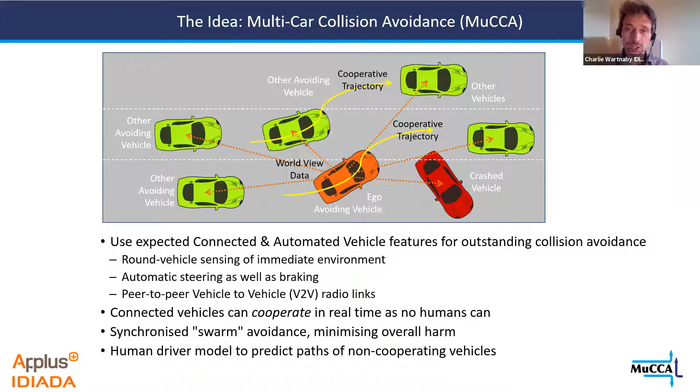So the project's scope also included modeling where human-driven vehicles are likely to go, where the humans are likely to drive them. And that was modeled in Cranfield, and actually you, being Cranfield, did experiments in simulator rigs to get volunteers to drive in simulated situations, and then model that with a recurrent neural network. And so that was part of the project scope. Now I won't tell you much more about that because that was the Cranfield part, and I can tell you more about the vehicle part that we were more involved in.

So I've said we wanted our vehicles to cooperate, and it's not at all obvious how you get them to cooperate. And when we started the project, I wrote a paper which, in retrospect, is mainly nonsense, for the Intelligent Transport Systems Conference, because at that point we were thinking we would need maybe a voting scheme or something. If you had multiple cars with different ideas of how they should resolve the situation, they'd have to kind of have a conversation almost, and maybe they'd have to rank their different solutions to how to avoid a collision, and then get everyone to follow someone's plan.

And then we're worried about what happens if the plan changes with time. But in the end, we didn't do any of that. We did something much simpler, which I'll show you. So hopefully I've got an actual simulation here. If it still works, haven't run this for a while, then I can show you how our cooperation worked.

So what we ended up doing was having a scheme where each vehicle kind of shared its plans with all the vehicles around it. So it shared its plan of where it intended to go, but also it would share its plan of where it wanted to go, even if it couldn't because there were other MuCCA vehicles in the way. So that's the planned and desired trajectories. So we call this the desired versus planned approach.

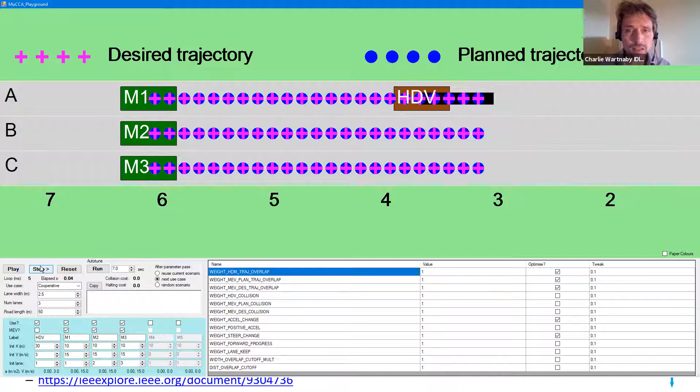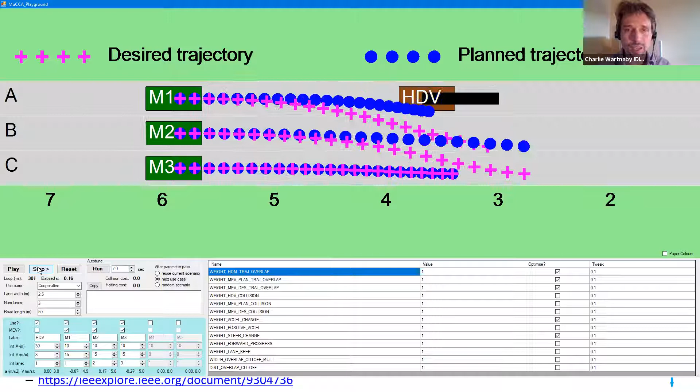And if I just reset, we don't have to just have 2 cars, we could have 3 cars. And we have the same sort of thing. So now M1's saying, oh, I want to swerve out of the way, but I'm going to plan to brake. Then M2 says, well, in that case, I would like to swerve out of the way, but I can't because M3's there. So I will just plan to go straight on, but I would like to steer if I could. And unfortunately, in this case, M3 is boxing M2 in, and that means M2 is boxing M1 in. So we don't have a cooperative swerve available.

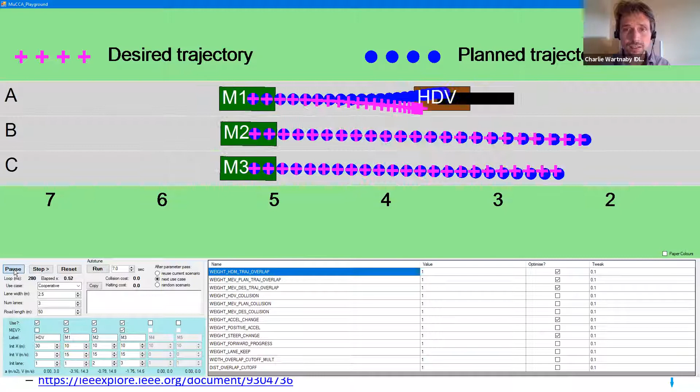And if I press play, M1 will eventually be forced to brake as hard as it can. M2 and M3 can get past all right. And it's going to be pretty close for M1. And oh dear, right, okay. So obviously that wasn't a good outcome.

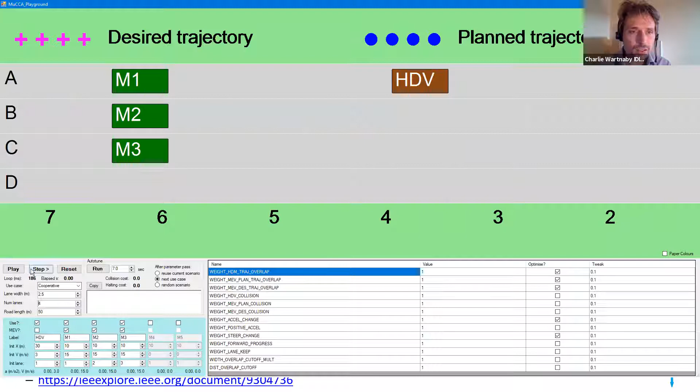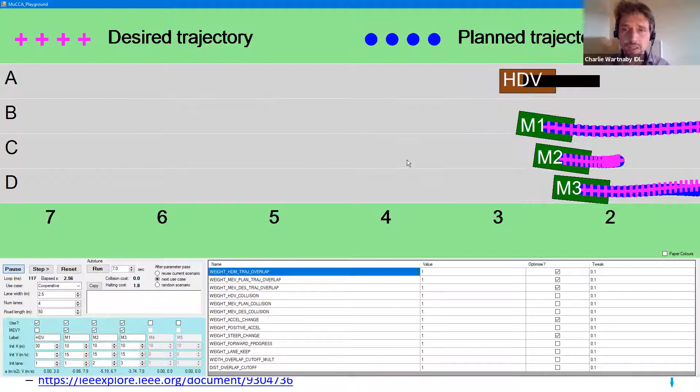But if we give it another lane and try that again. So now M1 says I want to swerve, M2 says I want to swerve, M3 says, okay, I can do that safely now. And they all get round. So that was the algorithm. Just sharing the desired and planned trajectories and accommodating each other. That's how we solve the problem.

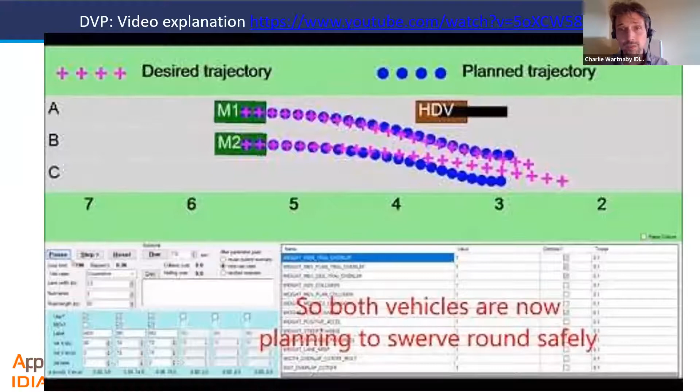So I'll just go back to the slides. Oh, there's a video. So there is a version on YouTube. So if anyone was looking at these slides offline, then they'll be able to play that.

Sorry. Right. So the actual solving of those trajectories was through model predictive control. For those who haven't encountered it, the idea is that you have a cost function that measures the goodness or the badness of your future trajectory. And the actuator outputs that control your vehicle are in effect the independent variables that you can apply as a function of time. So you might say, in 1 second I will be steering to the right, in 2 seconds I'll be steering to the left, in 3 seconds I'll be going straight on.

And you throw the actuator outputs, the variables, into a numerical optimizer. The cost function is then minimized by avoiding things like overlaps between vehicles, and you end up with an optimal trajectory that you can achieve given real actuator outputs. And then you apply whatever the immediate outputs should be, throw away the rest of the solution, and do it all again in another time step. So that's how we plan the trajectories.

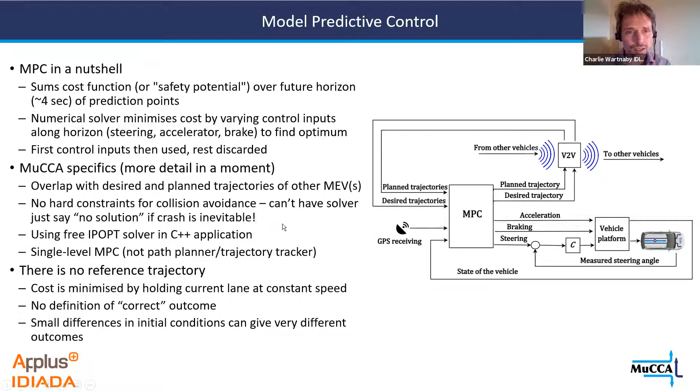Now the version in the vehicle was pretty simple, but at Cranfield, Marco's colleagues did some much more advanced versions with more fancy solvers and 2 levels of MPC, one for trajectory planning and one for trajectory tracking, and a much more complicated vehicle dynamics model, which we didn't have. So within the scope of the project, there was a lot of detailed work done here, but the version on the vehicle was relatively simple. I'll just go on to the next couple of slides because that'll explain things better.

So we want to avoid the cars overlapping because that's a crash. But sometimes people put that in as a constraint when they're doing cooperative work like this, so that the solver will never return a solution that results in vehicles overlapping, which sounds like a good idea. But if you're in a real vehicle, you might find yourself in a situation where a crash is inevitable. You don't want to ask the solver what do I do now, and the solver just says, sorry, no solution, mate, because you've got to do something.

So instead, you've got to have a finite cost to crashing. It's expensive, but your solver will still return a sensible solution, and that solution is likely to be brake as hard as you can to minimize the cost. So we used sigmoid functions like this to make a box of potential that discouraged the vehicles from overlapping.

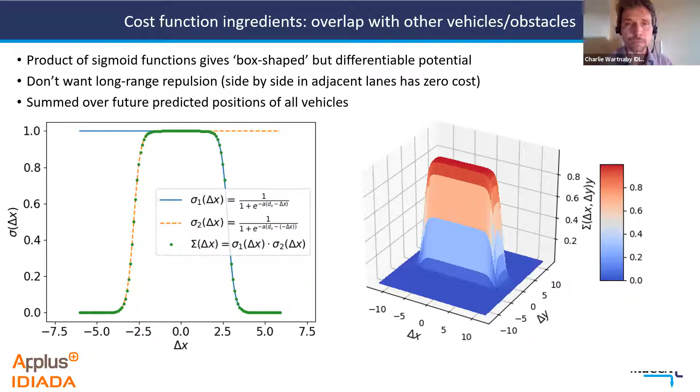There were some similar things for preventing vehicles going off the edge of the road, and then just a gentle term that meant the vehicles were encouraged to stay in lane. So this whole thing wasn't based on lanes. The vehicles were free to go anywhere they wanted across the motorway, but if there was no other reason for them not to, then they'd go straight on.

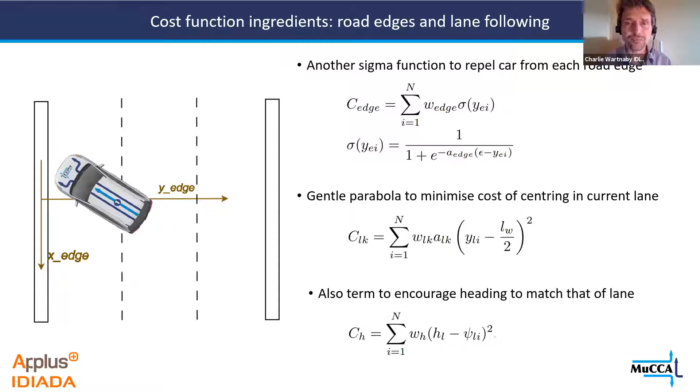We did have constraints on the actuators, so they'd be within physical limits, and also some terms to discourage very strong braking or very strong steering. In fact, we cheated a bit, and we particularly penalised braking because we wanted to see that kind of cooperative swerving behaviour. And that's because in a real motorway situation, when you're doing 70 miles an hour, if something bad happens just in front of you, you don't really have time to brake in general.

Steering gets you out of trouble in a better way. That's very different from an urban situation where you're driving slowly and you do some calculations about how to avoid collision. Then braking nearly always does work.

Now, in our practical demonstrations, the cars, I'm afraid, were going pretty slowly, like 20 or 25 miles an hour, but we wanted them to behave as if they were going down the motorway. So we wanted to encourage cooperative swerving, steering behaviour. So we just turned up the weight of the penalty of braking in our model predictive control optimizer to encourage that steering instead of braking.

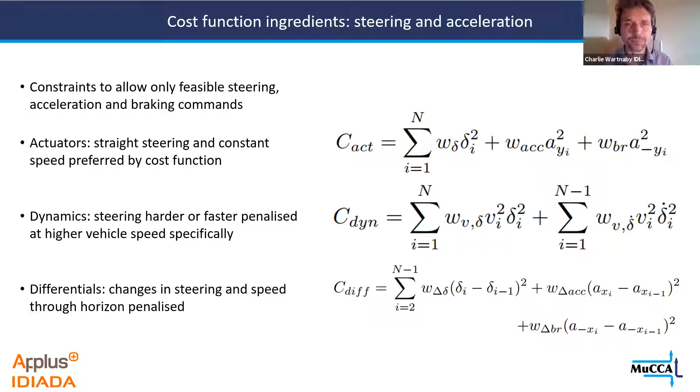So the actual cooperation was done via maneuver coordination messages. That's a draft from ETSI. And as far as I know, I don't know of anyone who's used those in real life anywhere else. If there was one thing that this project really succeeded at, it's that it was a very, very clear example of real vehicle-to-vehicle, radio-mediated cooperation amongst vehicles.

So we exchanged these messages that swapped the desired and planned trajectories every 20 milliseconds, which is much faster than we needed to, because actually our solver was quite slow. And the knowledge of what the vehicles could see was shared as well, which we used in demonstrations.

And actually Marco did some work on figuring out how we could best use a Kalman filter to combine a vehicle's own knowledge of what it could see with knowledge it learned from another car that would be time delayed. So you might say, oh, I can see a car there, but I've just heard from that other car that can see it better, that 50 milliseconds ago it could see it there. And knowing how to combine those optimally is something that Marco did.

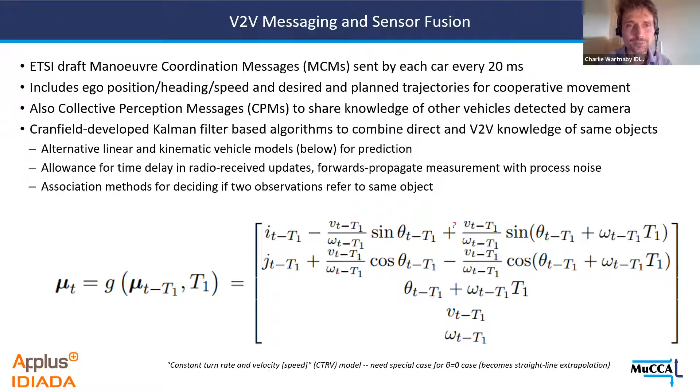So anyway, this wasn't just a theoretical project, it was real. And we went to the Bruntingthorpe Proving Ground to do this. In future, we'd go to CAVWAY, our own proving ground, once it's built. But here we are at Bruntingthorpe with a nice straight bit of runway and the strange aeroplanes parked around.

So we had a safety driver on each vehicle able to take control. And the safety drivers would set up the situation by driving the cars manually. And then when they were side by side, going at the right speed, they'd press a button on a dead man's handle. And at that point, the computer would be entirely in charge of driving the car. So the steering, braking, acceleration were all under car control. And that's true of both cars side by side, and they're talking. So then they become like a sort of hive mind.

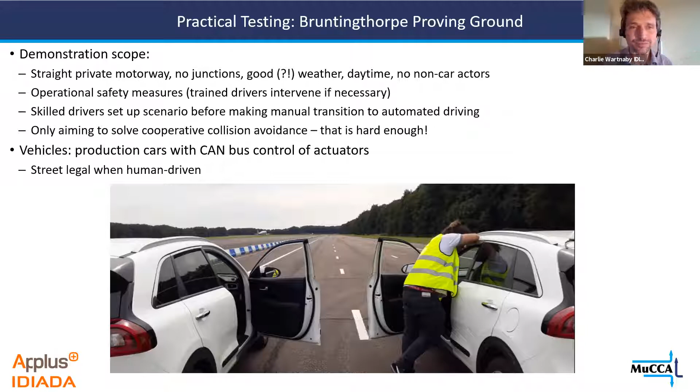Now in control terms, I've told you that we do a lot of electronics in Cambridge. So I don't know if you can see my mouse pointer, but that white box in the back of the car is a unit we built. So that's the main ECU, the main computer in the car. It's built around an NVIDIA GPU module, and it's got loads of I/O for doing automotive stuff. It runs Linux, but also it's got the built-in vehicle-to-vehicle radio and the built-in differential GPS as well. So it kind of had everything we need.

And we were quite proud of this, because if you look in the back of a lot of research vehicles, they're usually stuffed full of a whole rack of computers and bits and pieces held together with cable ties and Ethernet cables and things like that. Whereas we could actually hide all this underneath the boot floor and put our luggage in and drive to the hotel in it. So that was quite good.

We had a touch screen in the front, and that showed a picture of what the computers were understanding. So we could understand what they could see, and we could demonstrate that they were using this cooperative planning.

The only sensing we had, and this is going to really disappoint you guys in the Autonomous Vehicle Society, I'm sorry, we had one camera behind the rear view mirror, which had a neural network from another partner from Cosworth, and that could identify cars, but actually it didn't really work far enough away to do the main control task. So we used that in some demonstrations, but we generally relied on the cars just telling each other where they were using GPS coordinates. But then it's the cooperation that really mattered.

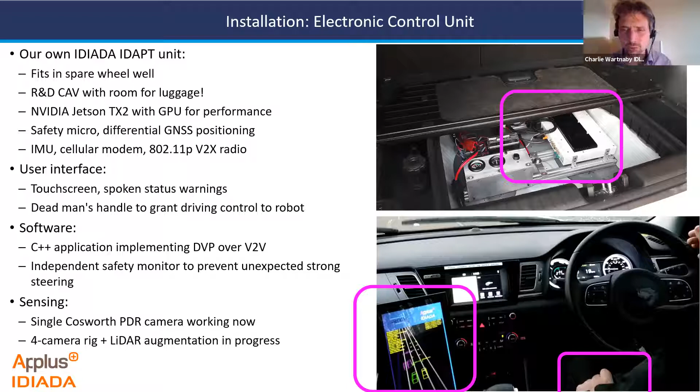So this was the kind of scenario we set up. So we had two cars side by side, very much like that simulation I just showed you, going down the road, coming up against one obstacle. They do this cooperative swerve that is the first in the world. It's great. And then they'd face a second obstacle and they'd split apart.

And I'll show you a video in a second, which is actually the one that we took in development work. It's before it was public. It was kind of less formal. The real thing is on YouTube, the kind of final dissemination event. So that's sort of more glossy production with drone footage and the foam cars and everything. With this one, we're just going around traffic cones, but I hope it gives you a better idea of what it was really like. So I will attempt to play this video.

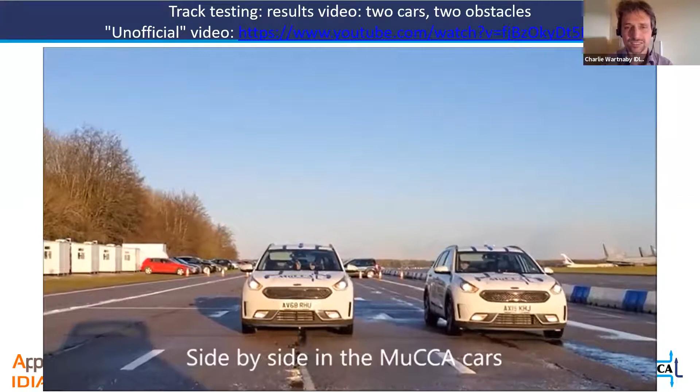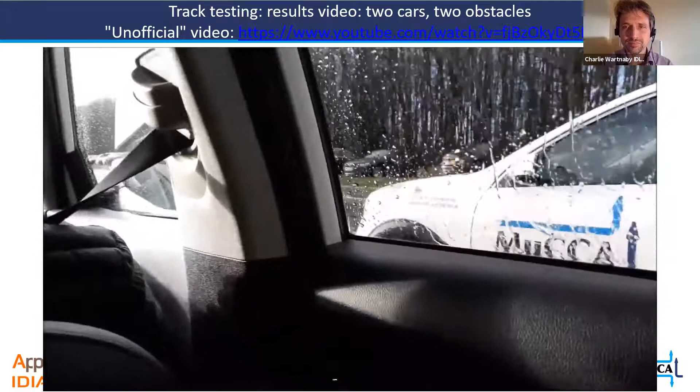Three, two, one, go. Okay, so we're side by side at 20 miles an hour in the two MuCCA vehicles. MuCCA has control. They're now fully under computer control with cooperative algorithms running, coordinated by vehicle-to-vehicle communications. Coming to the first obstacle in lane 1, so we expect a cooperative swerve away, which has happened.

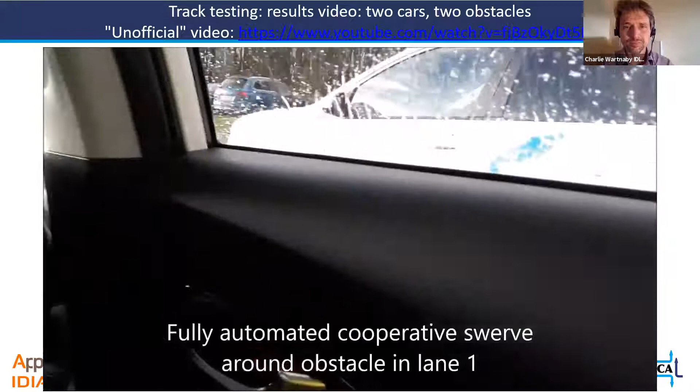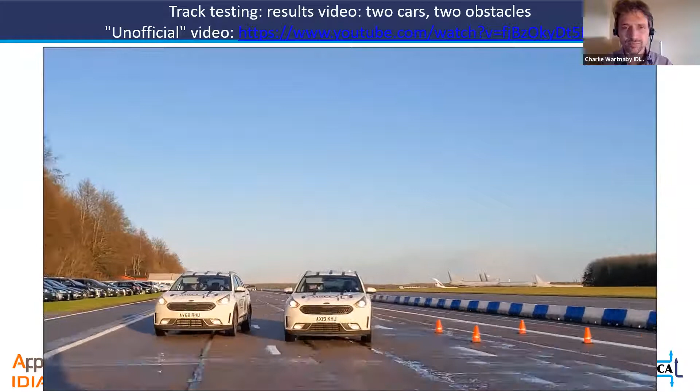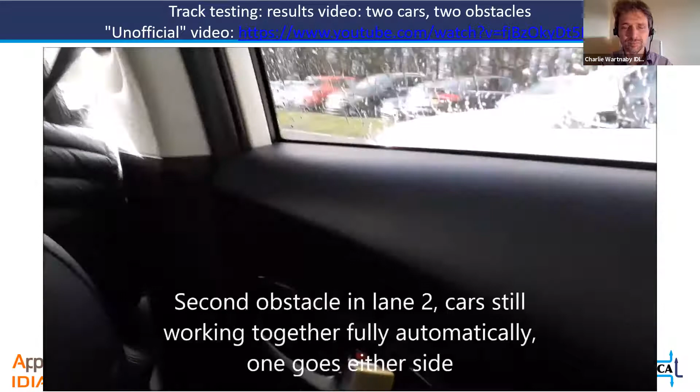Avoiding collision. Yeah, okay. You okay? Okay. Yeah. And now we're facing another obstacle in lane 2. So in this car, yeah, we should swerve away from that, and the other car has gone past in lane 3. That's perfect. We are going. Okay. Yeah. Okay, we're okay. Yeah. We're fine. Okay.

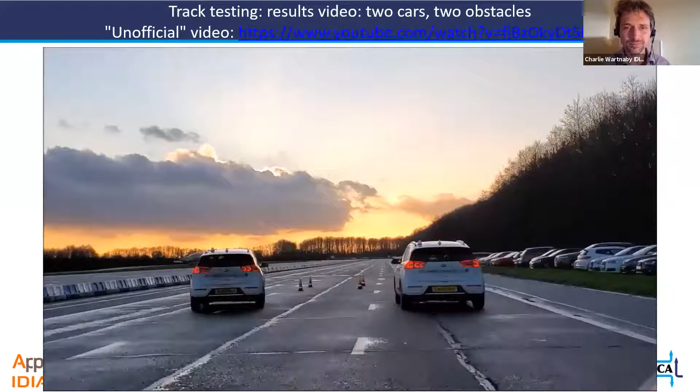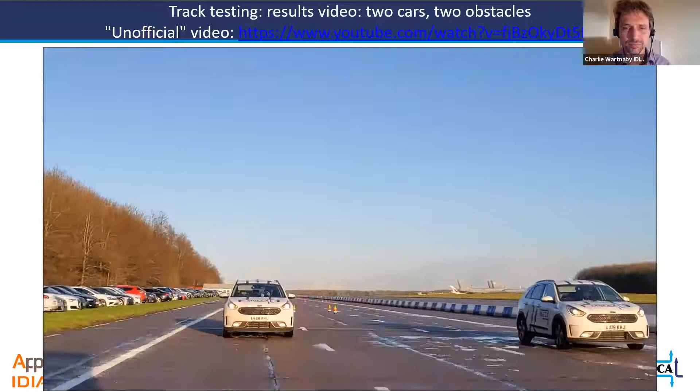Right, so that's not the kind of glossy, polished version, but hopefully it gives you more of an idea of what it's like being an engineer in the back of the car. You know, we're playing with walkie-talkies and getting cold in the rain, putting cones out and things like that. But when we were getting cold in the rain, I always told everyone, you're living the dream, because so many people will be jealous of doing a project like this.

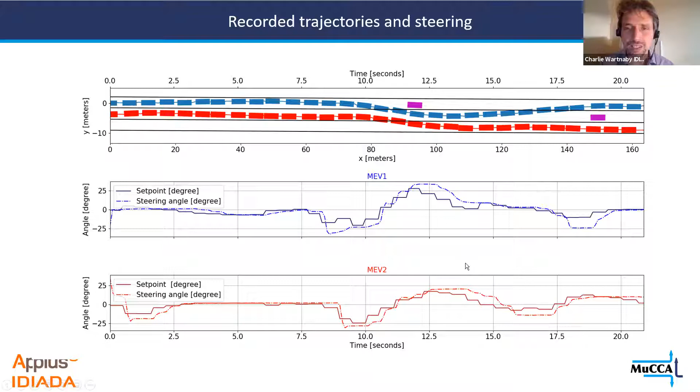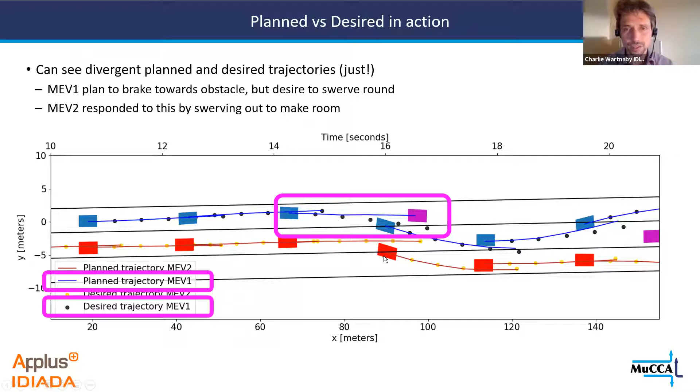The blue line shows that it was planning to go straight towards the obstacle, and at that instant, communicating that, and over the next couple of iterations, that encouraged the red car to get out of its way. So the algorithm did work. So this wasn't a fix. Because these cars were programmed to kind of help each other, to cooperate, they would actually sometimes surprise us.

Although actually we had one older one that kind of blew apart in the wind. It was very windy there. It was very spectacular, and we had everyone out there chasing down the runway to pick up bits of car.

We were caught out sometimes if they tried to go the wrong way round an obstacle. So maybe they thought, oh, I can squeeze between that and the edge of the road. You know, that's not what we intended. And I even had the experience, I was just driving back up the runway once, and I put the thing briefly into automated mode because we had a bug, which meant it wasn't clearing its last actuator outputs. And suddenly my car just changed lane, and I didn't know why.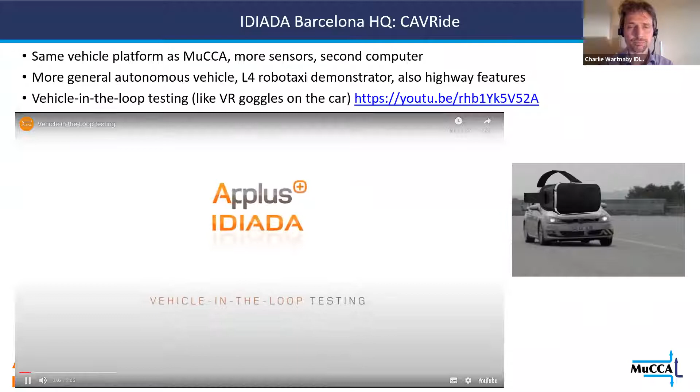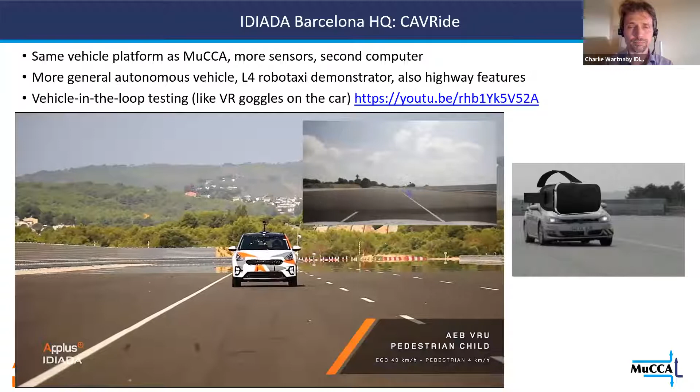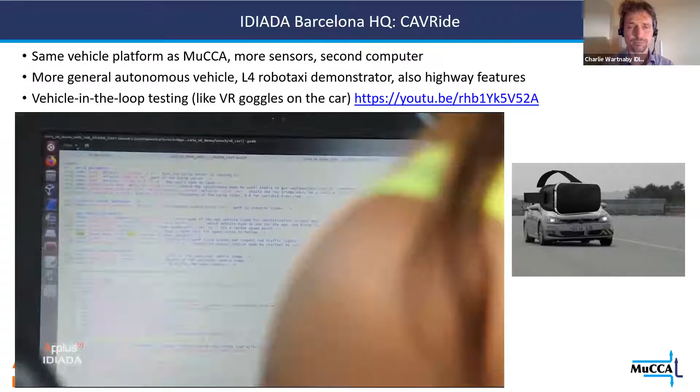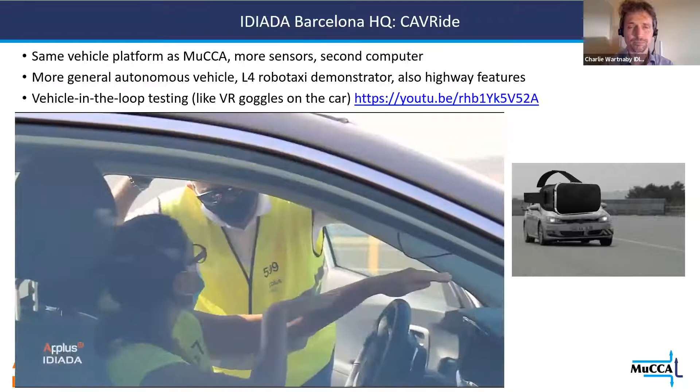Vehicle-in-the-loop covers the current gap between simulation and physical test methodologies by integrating a real vehicle into a virtual traffic environment. Thanks to our expertise in advanced simulation tools, we have designed a new virtual testing platform to support the development of ADAS and automated driving. By applying IDIADA's methodology, information from the geolocalization of the vehicle allows us to merge virtual and physical worlds, providing immersive scenarios to the driver. The main applications of vehicle-in-the-loop are the pre-calibration and evaluation of ADAS and automated driving systems. It is also being assessed by Euro NCAP to be included in the vehicle safety rating process, allowing a wider test matrix coverage.

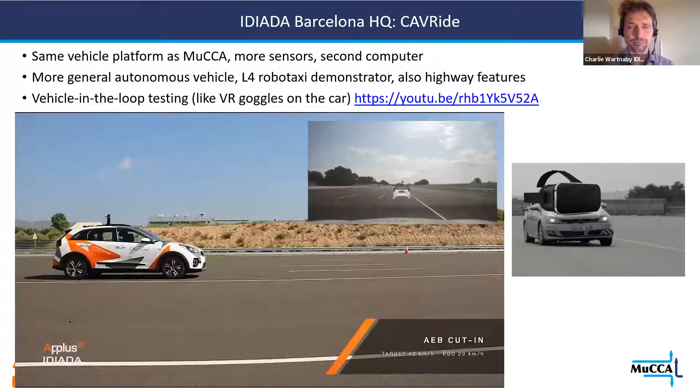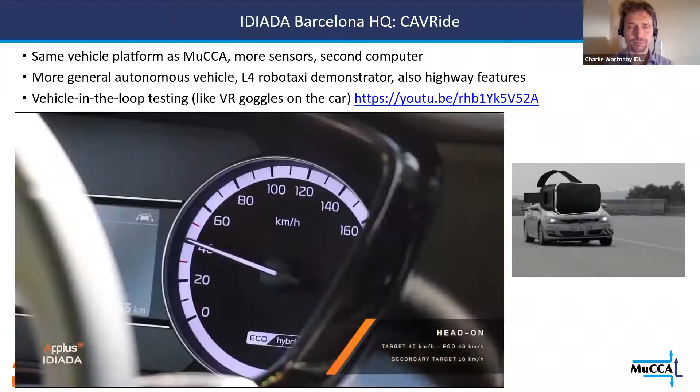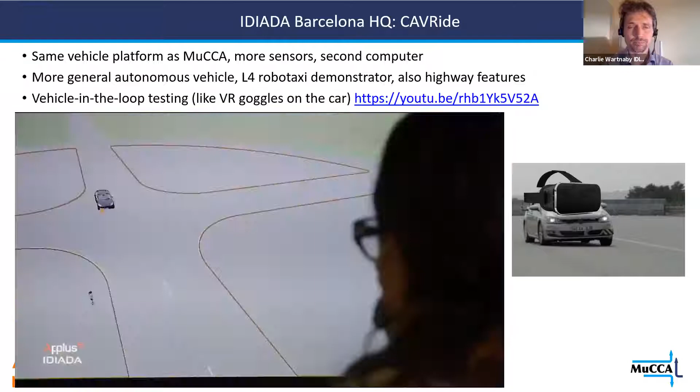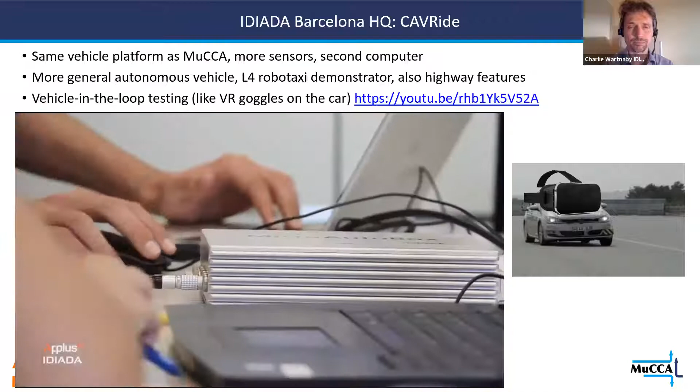A wider range of complex traffic scenarios according to existing and future standards, guaranteeing the driver's safety. Our vehicle-in-the-loop testing is a cost-effective solution that allows ADAS and automated driving systems development and validation in multiple complex scenarios with a high degree of accuracy and repetitiveness. IDIADA has all the necessary know-how and tools to perform vehicle-in-the-loop turnkey programs. Our versatile and modular virtual platform is a tailored solution that adapts to our clients' requirements.

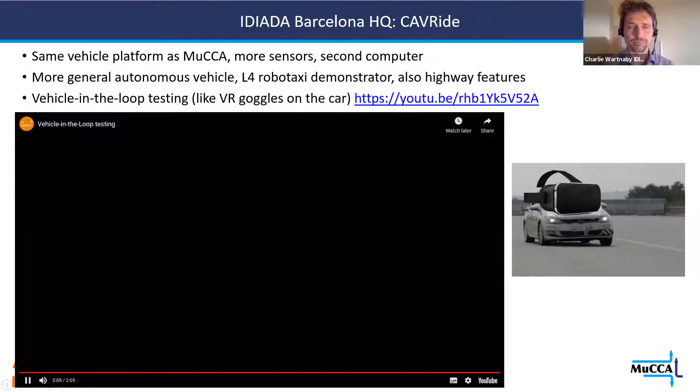Right, so there are a couple of details there which I should tell you about. I'm sorry, but I think we're also looking at for Cavway. And the simulator they were using to kind of move the kind of virtual actors was... oh yeah. I think we missed the details, unfortunately.

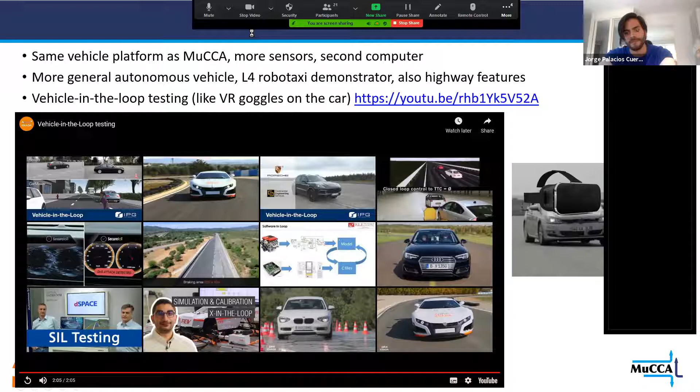It seems like your connection is struggling at the moment. Oh no. Okay. You can repeat it. I thought it was just a very interesting part. Okay. Right. So can you hear me now? Yes. Your video is frozen as well, so maybe you can disconnect the camera, I guess. Oh, right. I'm sorry. Were you able to see the YouTube video? Yeah. Oh, good. Right. Okay, I'll stop my video. I got a new router last week. In fact, we've got two new routers, so I hope I'll be okay. I mean, if you lose me again, I will go downstairs and find an Ethernet cable to plug into the side of my computer.

Thank you. So a couple of details there is that we were using the OpenSCENARIO language to define the test scenarios, and it was working with the CARLA simulator. So there was actually a big laptop in the back of that car running CARLA, and there's a component of CARLA called Scenario Runner. And these are all things we're looking at using on Cavway as well.

And incidentally, should you get involved in vehicle work at IDIADA, I had to go out there and do a kind of driver training course. I had to go at high speed around the track and do braking on slippery surfaces and oversteering and stuff. And oh no, I was going to show you my vehicle pass, but I've just turned my video off. Never mind. So anyway, it's good experience going out there. It's an amazing place, and hopefully our own facility here in the UK will be very similar, but less sunny.

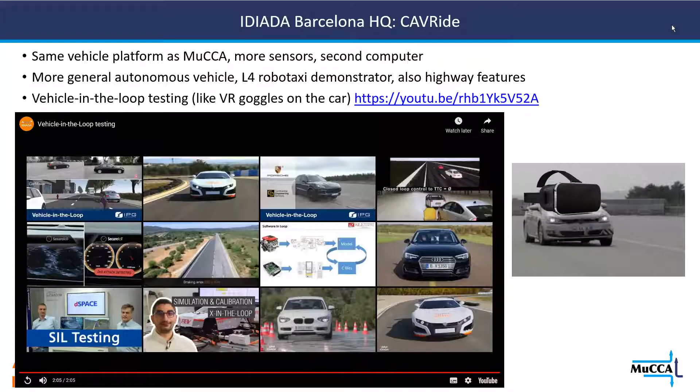Right. Okay, so this one is what we're intending for the UK. The UK government is putting money into connected and automated vehicle testing grounds. And they're not all the same. They want a variety. So some of them are public roads, some of them are private facilities. Some of them are to do with parking, and some of them are to do with urban situations.

So we've been given funding to support the building of this proving ground that's all about junctions. So like big motorway junctions. We could also set up smaller junctions. So this is going to be a really big part of the work at IDIADA for the next 10, 20, 30 years or something. It's really going to shift what we do in the UK. So I'll play the video. Again, do just tell me if there are any problems with it.

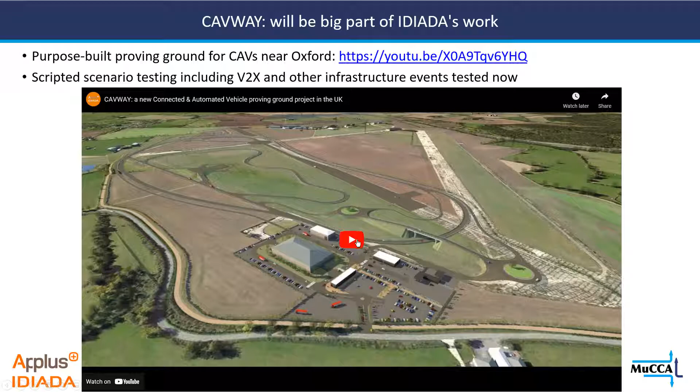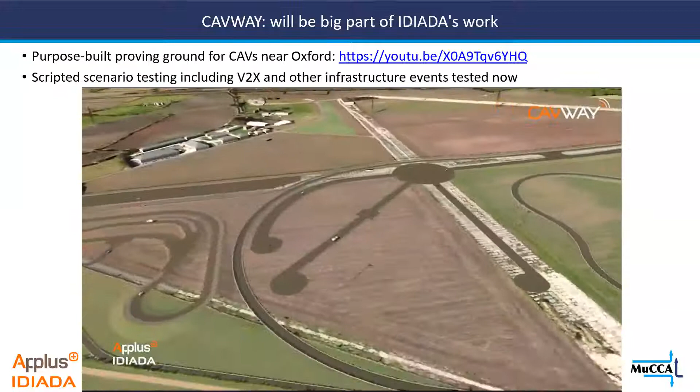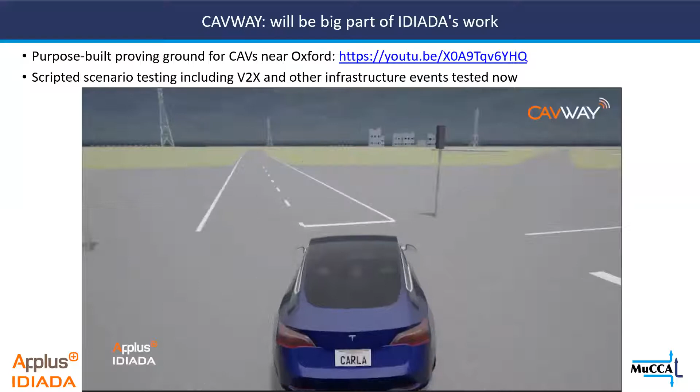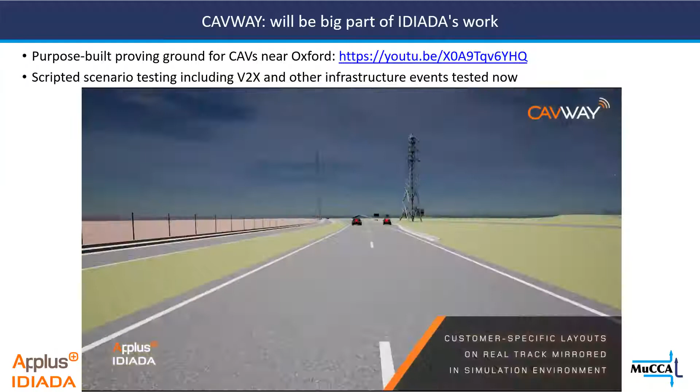Cavway is a new connected and automated vehicle proving ground designed and operated by IDIADA together with our consortium partner Prova Developments. It will be based near Oxford in the UK and completed by the end of 2021. What makes Cavway unique is that it will include a comprehensive set of highway junctions, all within a fully connected, controlled, repeatable and safe environment. It will also offer ADAS and automated driving development and validation capabilities according to the latest Euro NCAP and homologation regulation requirements. As for connectivity, Cavway will provide a fully configurable site with V2X, C-V2X, and 4G and 5G coverage, allowing a wide variety of testing possibilities for development and validation projects. At Cavway Proving Ground, it will be possible to control everything the vehicle sees and hears in a coordinated way to set up all kinds of tricky edge case traffic scenarios, enabling seamless integration between experimental and virtual development work. Cavway will be a comprehensive, versatile and virtual development site, ready to perform all the required development and validation testing programs for future connected and automated vehicles.

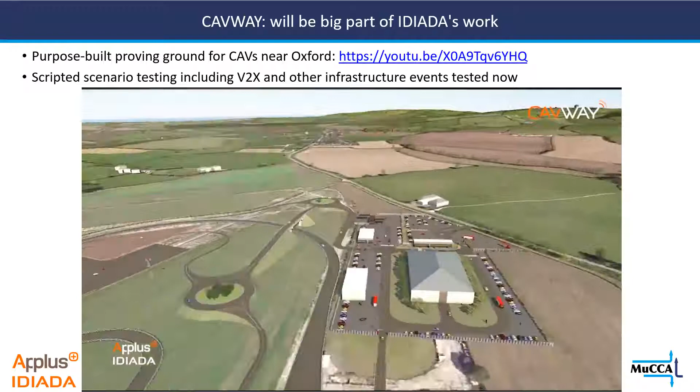Right, so I should just tell you a couple of technical things about that. So firstly, the IDAPT unit, that white computer I showed you in the back of the MuCCA cars earlier, is going to be used as the roadside unit at CAVWAY, doing the vehicle-to-infrastructure communications. So that's something we're working on now.

We're doing a load of software work. We've got units set up in the Cambridge lab talking to each other, and we're building new software so that we can get them all to act as a coordinated set. So there's a lot of stuff deploying things in Docker. It's all Linux-based applications that are running. And the simulation environment you saw there, it's CARLA again. And again, it was using some OpenSCENARIO scripting.

And another aspect we saw very briefly was designing the layout. And we kind of designed the track, especially if we want to change it for individual customers, in OpenDRIVE format. So that's like a kind of industry standard format for sharing maps of, you know, representing road layout, and it includes information like lane widths and lane speed limits and things like that.

So there's a certain amount of standard file format use, standard tool use that's really important here. That's partly because we want, if people come to our place to do testing, we want them to then be able to move that work elsewhere, to be portable, to be interoperable.

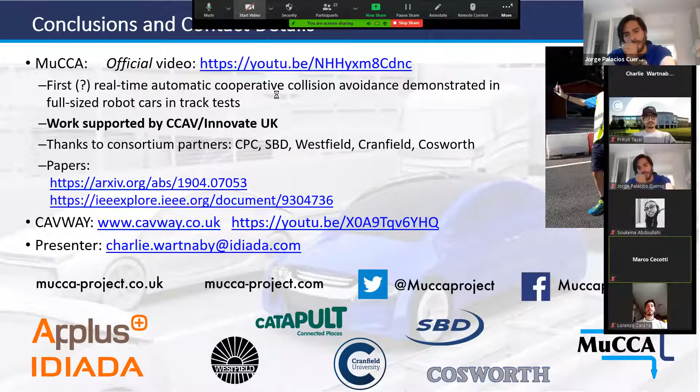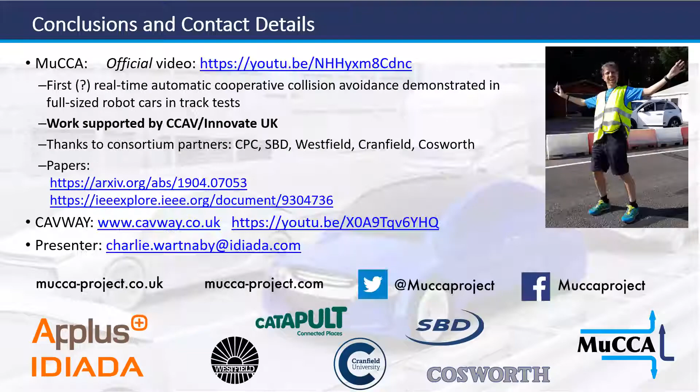All right. Okay, so that's all the talk I've got prepared, but do hit me with questions. And I really fear your questions because you're a bunch of automotive academics and I'm not, so you have to go easy on me.

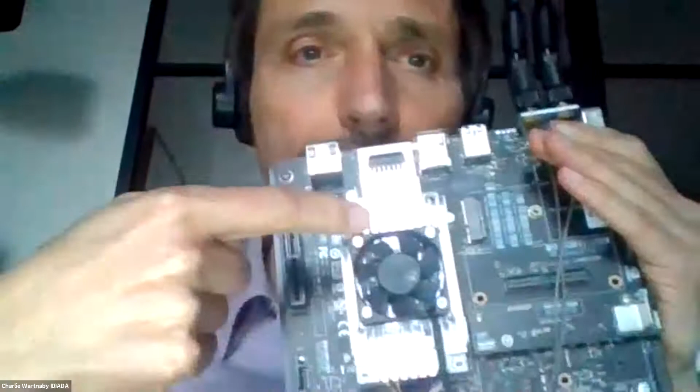So this module has an NVIDIA Jetson TX2. That's what we actually used for MuCCA. The IDAPT units are getting an upgrade now. So yeah, that's the unit. It's got the cooling fan. I don't think we troubled the cooling fan too much because our computations didn't really use the GPU, except when we were doing the neural network stuff, perception, or for human driver modeling, which we tend to do as a separate activity.

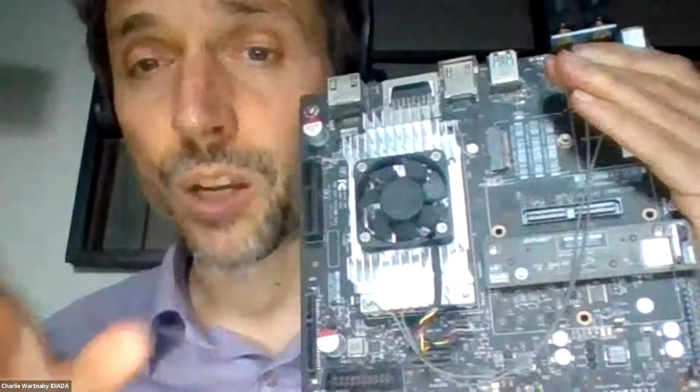So it's like a 6-core CPU, 8 gigs of RAM, I think 32 gigs of hard disk, and it was working moderately hard, but not maxing it out. I think the kind of modules people use for doing real self-driving tend to be quite a lot more powerful than that now, given the computational requirement.